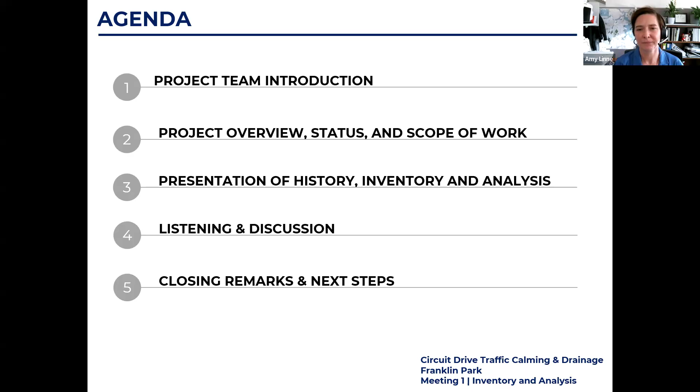Once again, I'm Amy Linne, Project Manager from Boston Parks. Also joining us from Boston Parks, we have Michael McMillan, Community Outreach Coordinator, and he will be moderating the meeting tonight, and Lauren Bryant, Project Manager for the Franklin Park Action Plan and other capital projects in the park. For the Mayor's Office of Neighborhood Services, we've listed our neighborhood liaisons. They're a great resource for community concerns. And then our consultant team is Nitsch Engineering, covering transportation and green infrastructure. Reed Hildebrand, who is the lead designer for the Franklin Park Action Plan, is on the team in an advisory role.

This is the first community meeting for the Circuit Drive Safety Improvement Project. With the feedback from tonight and from an online survey we'll distribute soon, the design team will develop a concept plan to share at a second engagement event in the summer. Then at the final meeting this fall, we will share the recommended design. During the fall and winter, our design team will develop construction documents and also go to Landmarks Commission for project approval. We expect to start construction on the roadway improvements in early 2026 and complete the work in summer 2026.

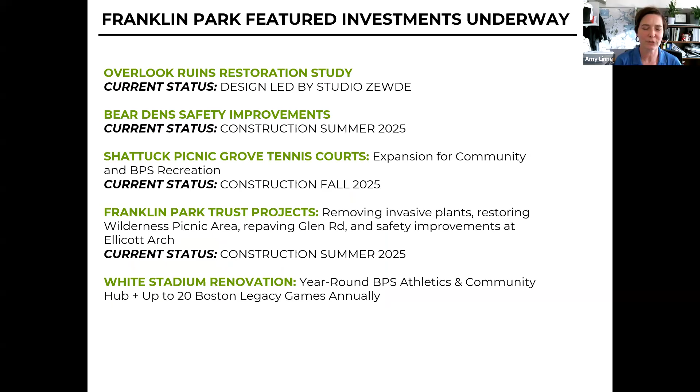Circuit Drive is one of several projects going on at Franklin Park. I will add a link in the chat for the Franklin Park Initiatives webpage in case you would like to look into the other projects in more detail.

Next slide. So this is an overview of our approach to open space design, which includes the City of Boston priorities, safety guidelines and regulatory guidelines, such as ADA, community input, such as this meeting tonight, and the Parks and Recreation goals.

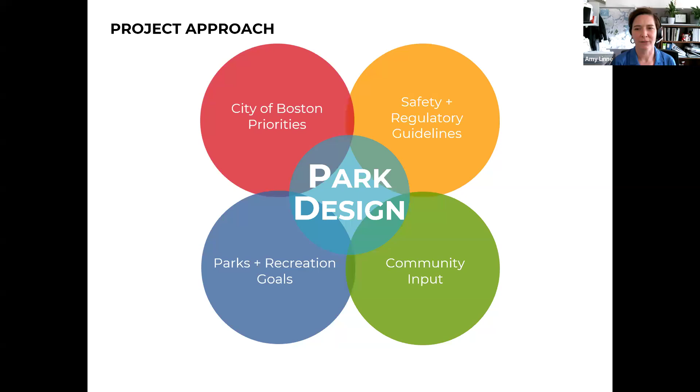So with that, I will hand it over to Jeff Bandini from Nitsch Engineering.

Thank you, Amy, and thank you everyone for having us present to you this evening. Again, Jeff Bandini, Senior Project Manager with Nitsch Engineering. I have two esteemed colleagues with me this afternoon to share some of the great feedback that we've received from the Niche team, Maddie Augustine, who is a transportation engineer in our group, and Sydney Picard, who is one of our water resources design engineers.

And also Lydia Cook, Senior Associate from Reed Hildebrand, who we mentioned as part of the advisory role based on her experience in the Franklin Park Action Plan.

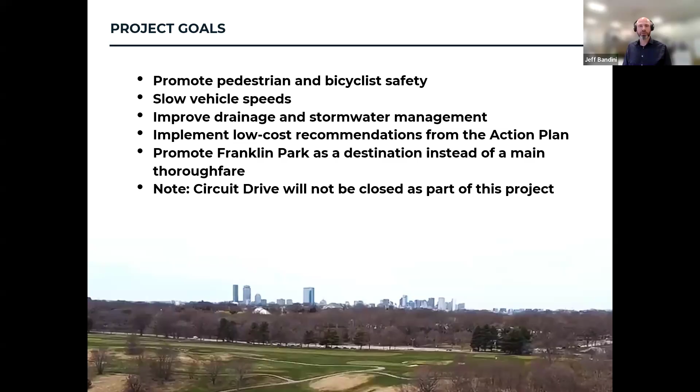As far as the initial scope of this phase, that was not being considered. Mostly our goals are to present sort of the low cost, very easy implementable solutions to address some of the concerns that we'll share with you this evening. Next slide, please.

So Lydia from Reed Hildebrand is going to discuss some of the, a little bit of a recap from the action plan and how some of those next steps and implementation will be addressed as part of this scope of this project. Thanks, Jeff. Hi, everyone. My name is Lydia Cook, and I'm a landscape architect with Reed Hildebrand.

Our office led the design team for the Franklin Park Action Plan. Today, I'm going to share a little bit of context and background, both on the park's history and evolution, and also the analysis, high-level goals, and recommendations from the action plan related to Circuit Drive specifically to help set the stage for our meeting and conversation tonight.

Next slide. Many of you are familiar with and participated in the Franklin Park Action Plan process, but for those of you who did not, the action plan was completed in 2022 in collaboration with Boston Parks and Recreation Department, the Franklin Park Coalition, and other park stakeholders, as well as the local community, to produce a strategic vision to guide investment in Franklin Park over the next 20 to 30 years.

Its proposals in this plan respond to changes that have taken place in the park over its 120-year plus history, but also seek to meet this moment in time.

They advocate for thoughtfully guided, community-driven improvements that are grounded in a deep understanding of the park's historic fabric, its ecological systems, and that those recommendations are implemented through continued dedicated investment so the park can do what it does today, but better. It's this work and many decades of the community advocacy for this park that sets the stage and the context for our continued conversation tonight.

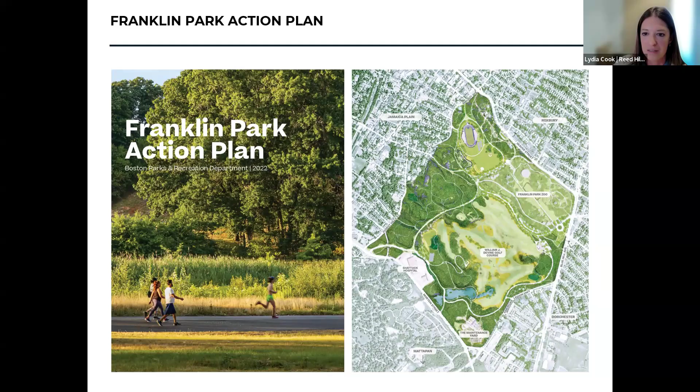For tonight's conversation, the most pertinent one is clarify movement. This recommendation encapsulates goals that support multimodal movement in the park, safety for bikes, pedestrians, and vehicles, improved access to the park's resources, and enhanced performance of its ecological systems, which in this case includes stormwater management and drainage. All of these goals relate to an improved experience along Circuit Drive.

Next slide. So let's quickly look back to understand how the park evolved to what we know and experience along Circuit Drive today.

After what we know as Franklin Park transitioned from agricultural homesteads and farm roads to a public park designed by Frederick Law Olmsted, the original Circuit Loop, as well as the Playstead Loop and other primary paths through the wilderness, were designed for moving around the park via horse and carriage, and Glen Road was intended for city through traffic. The park's circulation in that original design was responsive to site conditions.

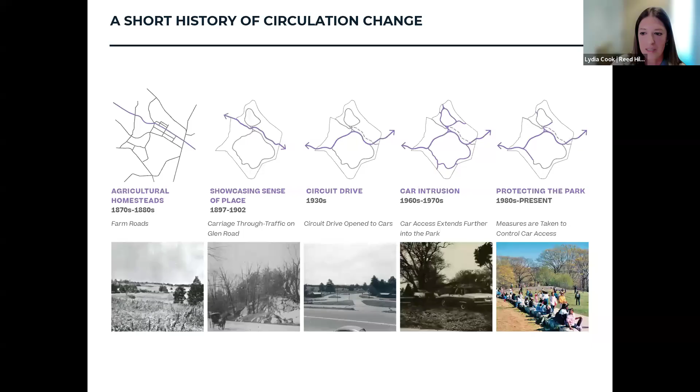Next slide. So in the more recent past, the southern portion of the Circuit Loop has been returned to a pedestrian and bike path. Today, cars and the city bus are still a very important part of how people move through the park and reach their destinations, whether that's Playstead, Ellicottdale, the zoo, or the golf course.

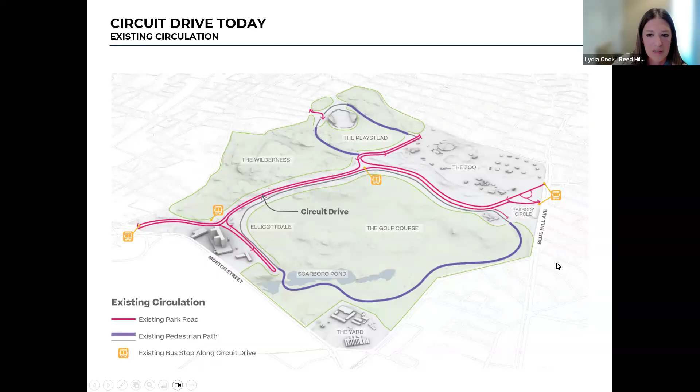Next slide. But we also know from our engagement in the action plan process that Circuit Drive is not just about cars, it's more than that. This also includes pedestrian paths that are highly used as a destination, drawing neighbors of all ages and from all directions for biking, walking, recreation, and community events.

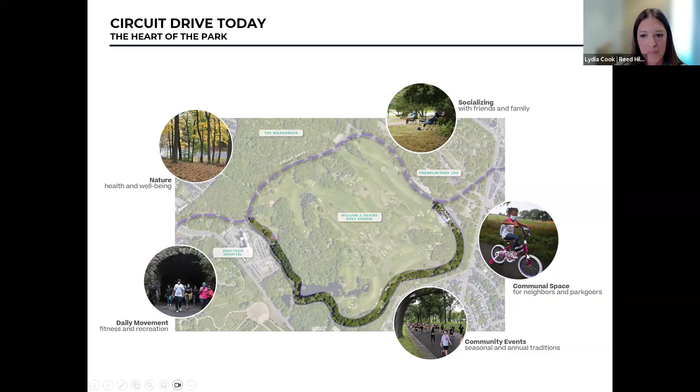Next slide. But there are some challenges associated with the drive today, which is what we're here to talk about tonight. There are areas of unclear or insufficient path and bike infrastructure, few designated crossings, and fast traffic along the drive, which can all create conflicts between pedestrians, bikes, cars, and parking areas.

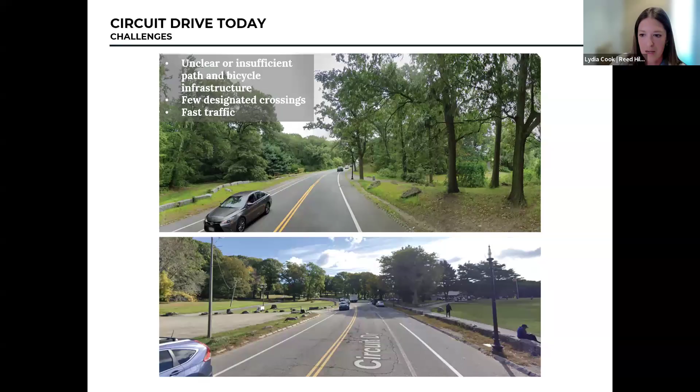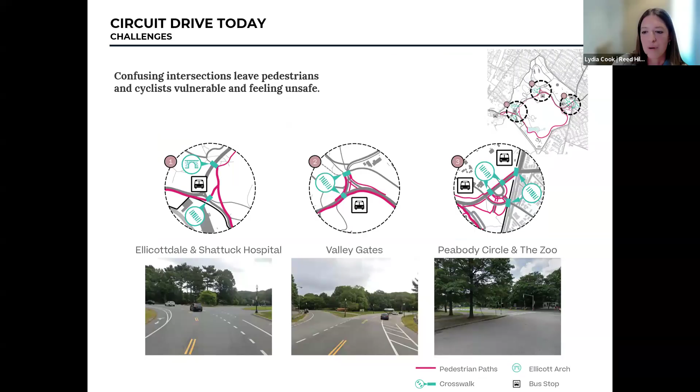Next slide. There are also several confusing intersections along the way that leave pedestrians and cyclists vulnerable and feeling unsafe. So really improving these pedestrian connections across and along the road, especially at these intersections, can enhance visitor arrival, circulation, and safety. Next slide.

While the action plan did look at proposals related to the comprehensive circulation system in the park, some of which were quite long-term and ambitious, it also included several immediate recommendations, or make-safe improvements, for Circuit Drive in particular. So we'll talk about some of those. Next slide.

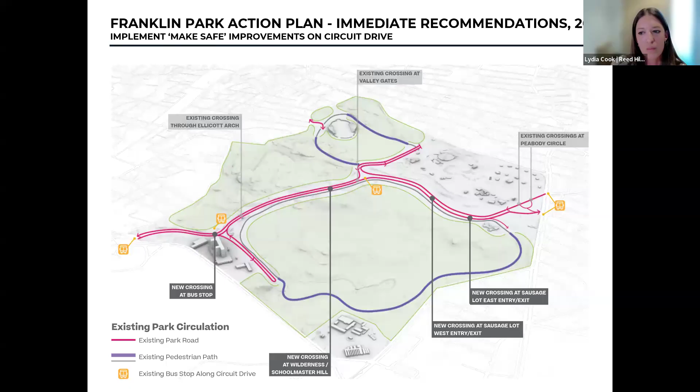Those included implementing immediate changes to improve safety for bikes and pedestrians along Circuit Drive, including adding crosswalks at key locations, considering traffic calming measures at key crossings to prioritize pedestrian safety, providing a designated and continuous bike lane along the drive, maintaining critical bus stops to ensure access for all park users, collecting updated traffic counts, which Maddie will talk about, and continuing coordination with city agencies that Amy mentioned at the beginning, including the Boston Transportation Department. Next slide.

The action plan also included a high-level inventory of drainage challenges in the park. Today, the park suffers from an aging and undersized pipe drainage infrastructure, which often causes localized flooding and other issues. A major factor in the declining water quality of Scarboro Pond is polluted runoff from Circuit Drive and the parking areas along it.

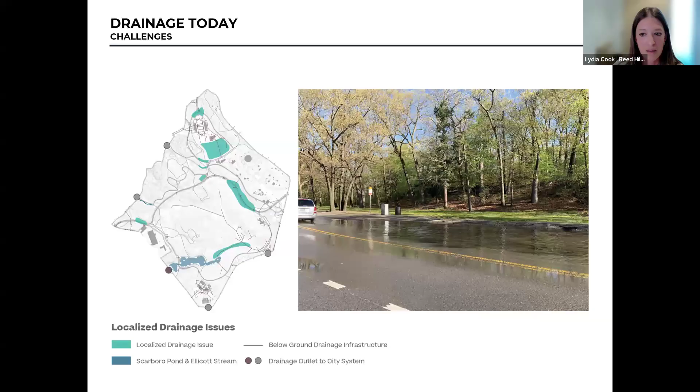So this runoff is carrying debris and other pollutants that discharge directly into the pond or the city's drainage system, and impact water quality both within the park, but also can cause flooding downstream of the park itself.

As we know, the health and resilience of the park's hydrology really goes hand in hand with the function of the park's above ground and below ground drainage systems, and offers opportunities for on-site green stormwater management.

As it relates to Circuit Drive and the areas adjacent to it, the action plan identified two very high-level strategies that can be considered, and Sydney will talk more in depth about this. The action plan identified hold and release—an idea around using areas like parking to slow and hold peak stormwater runoff during storms by detaining water and slowly releasing it back into the piped system.

Slow and clean is using Circuit Drive as an opportunity to intercept runoff before it reaches the golf course by rerouting it through vegetated swales, through curb cuts, to filter and slow water before it enters that pipe system.

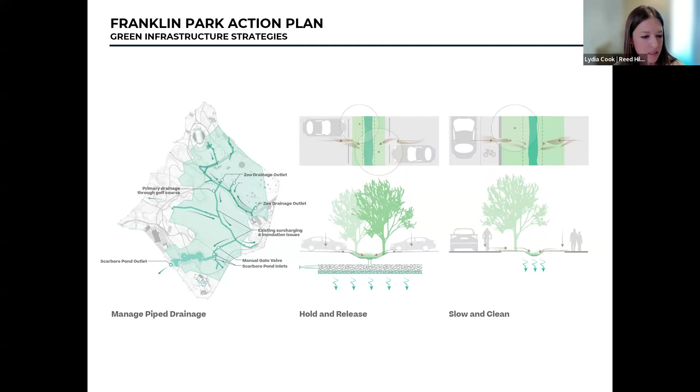So I will now turn it over to Maddie to talk a little bit more about the transportation analysis findings. Thanks, Lydia. So I'm Maddie Augustine. I work for Nitsch Engineering as a transportation engineer, and I'm going to be running through some of the observations we've made about the transportation side of Circuit Drive.

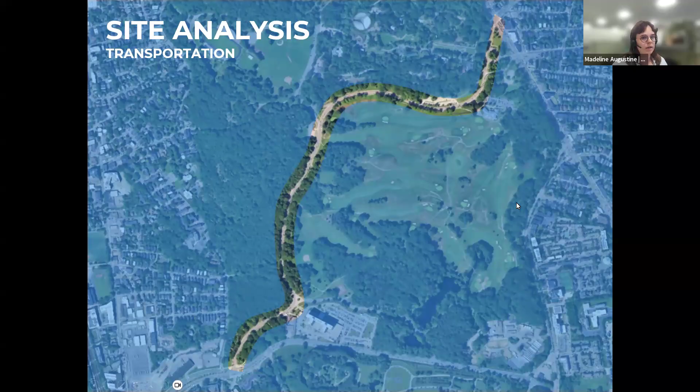We'll look at some prospective strategies as well for possible solutions. Franklin Park and Circuit Drive itself are situated within a broader network of parks, including the Arboretum as part of the Emerald Necklace, Southwest Corridor, and Circuit Drive provides connections both to and through Franklin Park between the Roxbury, Dorchester, Jamaica Plain, and Mattapan neighborhoods.

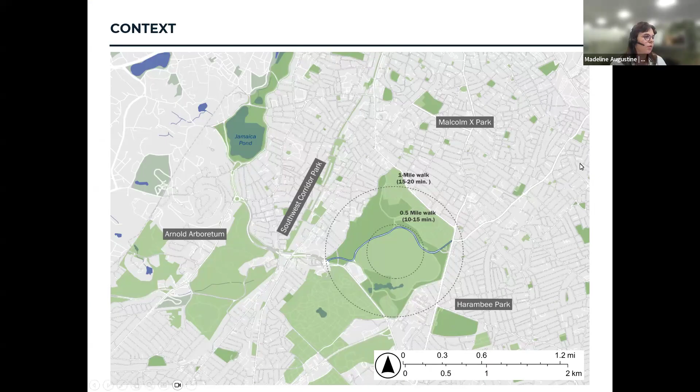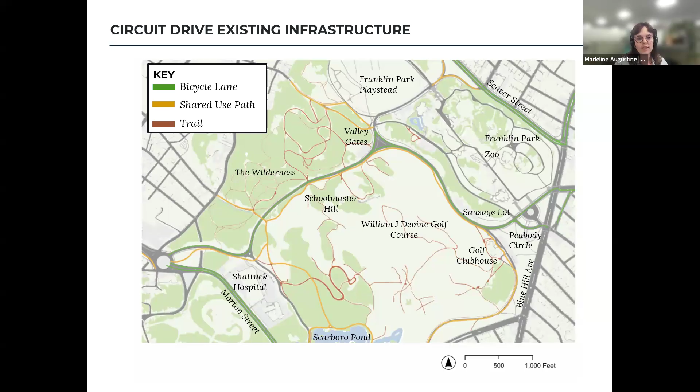Within Franklin Park, there's an existing network of shared use paths and trails, as well as on-street bike lanes in some locations, and vehicle lanes and parking areas. All types of roadway users use Circuit Drive to access Franklin Park and the surrounding neighborhoods, and buses also utilize Circuit Drive, particularly MBTA Route 16, which stops at Peabody Circle, Valley Gates, Shattuck Hospital, and Morton Street.

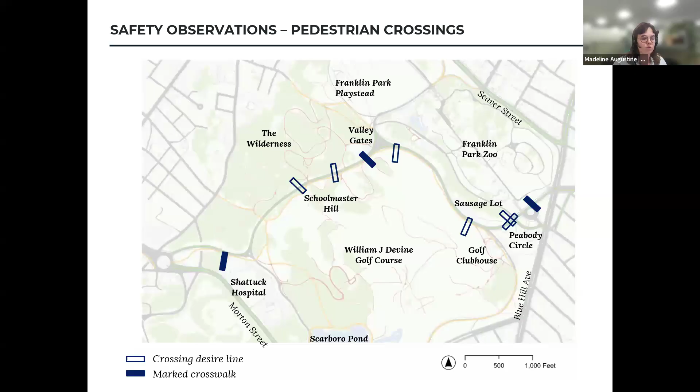Looking at crossing the street as a pedestrian, it can be relatively challenging due to the wide roadway and high traffic speeds, and I'll talk a little bit more about the specific speeds later. But there are several locations where a pedestrian may want to cross the street despite a lack of formalized crossing, such as by Schoolmaster Hill and the Wilderness.

Looking at where there are marked crossings, these are often very long and leave pedestrians exposed to traffic for a long time, as they take over 50 feet just to cross two vehicle lanes of moving traffic.

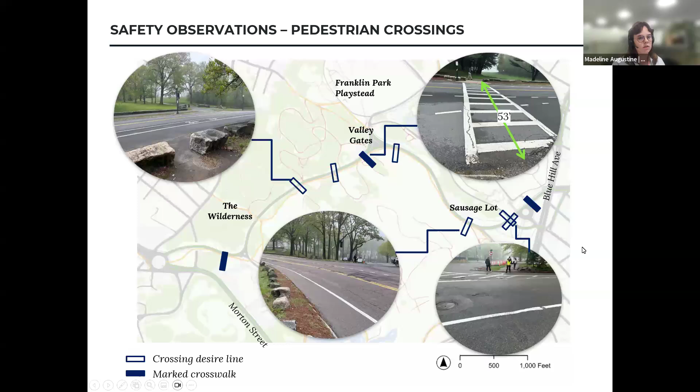While there are existing shared use paths and other walkways through the park, there are also a lot of areas where pedestrians are walking along desire lines where, despite a lack of pavement, there are worn areas where people walking is wearing away plants that hold soil into place. These worn areas raise safety and accessibility concerns.

One of our theories is that pedestrians end up stuck alongside one side of the roadway as they try to cross, but are unable to.

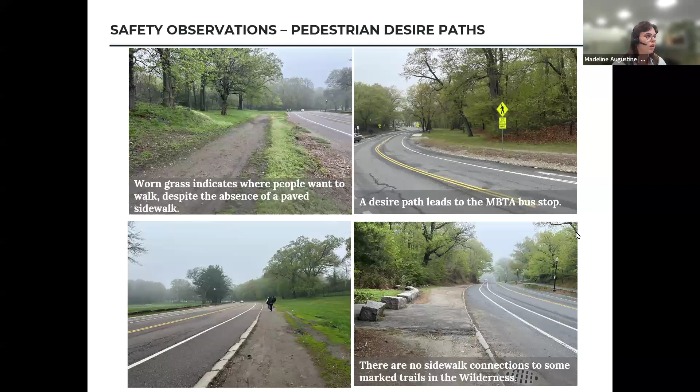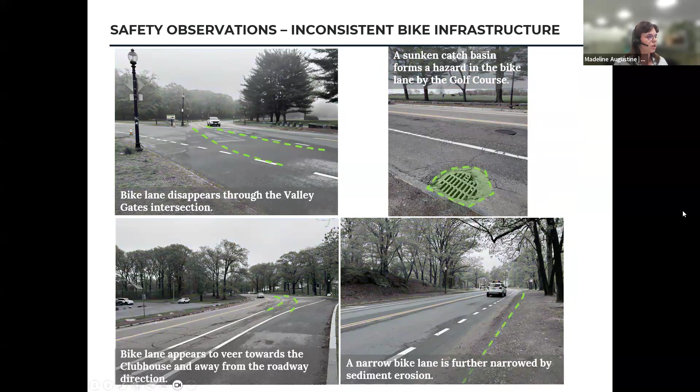If you're on a bike going along Circuit Drive, the bike lanes are inconsistent or sometimes impacted by sediment erosion or a curb, a catch basin that has settled. Bike lanes appear to veer in different directions or they disappear through intersections. This highlights a little bit of where we would expect to see some of that bike infrastructure.

Some of the erosion that we saw in the bike infrastructure is also present and impacts accessibility of bus stops. There are sediment impacts near the Shattuck Hospital bus stop, and close to Valley Gates, there's no clear location for bus riders to wait, board, or alight the bus.

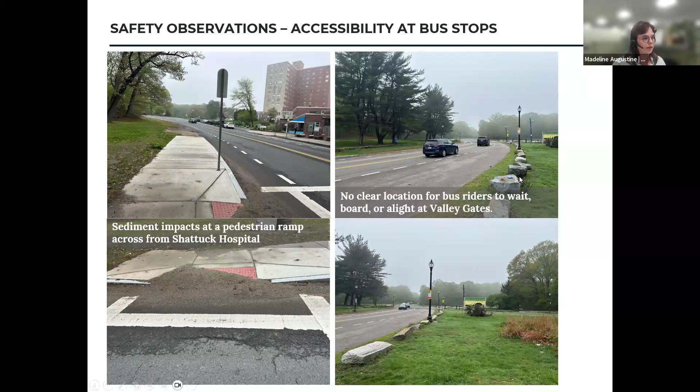If you're a driver, there's also some confusing expectations. There's a lack of wayfinding to zoo parking lots, and there's dual signals at Peabody Circle, which may encourage drivers to speed up and beat the light rather than slowing down to enjoy the park atmosphere. There's some signage without corresponding crosswalks, which just leads to some confusion as well.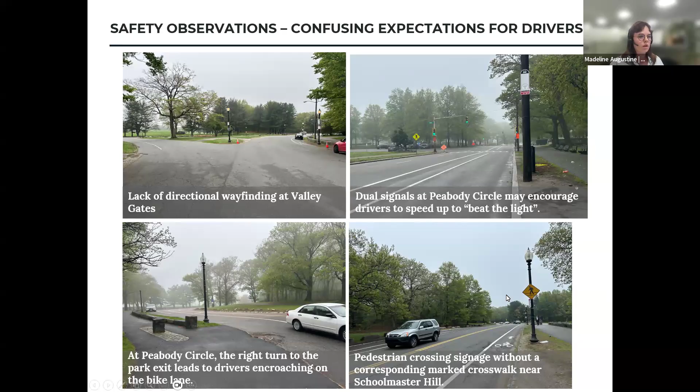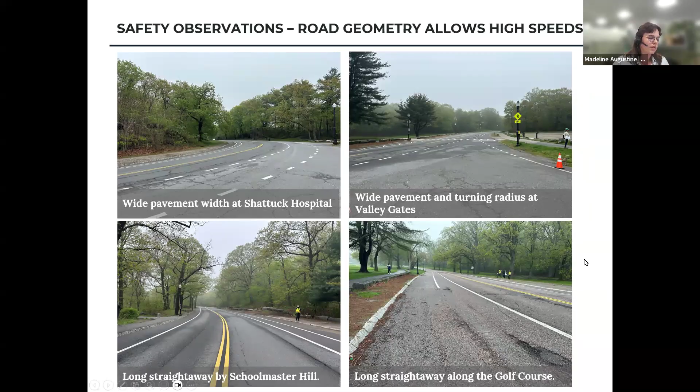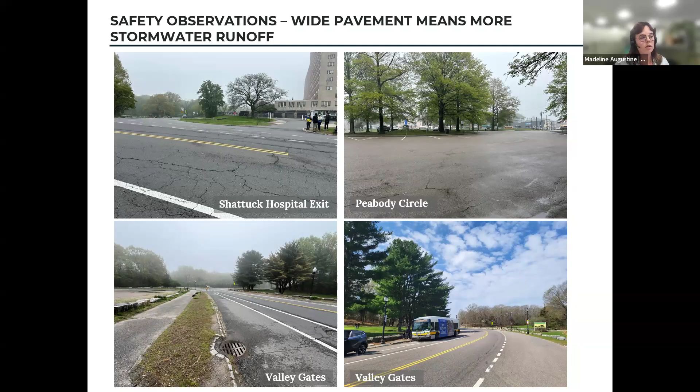The wide pavement widths and long straightaways also allow for high speeds, so the road geometry is making drivers feel comfortable to go fast. We see long straightaways near the golf course and Schoolmaster Hill, and wide turning radii and long crossings. Wide pavement also means more stormwater runoff, which again Sydnie will talk about, but there are opportunities for us to use some transportation solutions and create space for some green infrastructure as well.

Looking at the quantitative side of all of this, we collected traffic data on a consecutive Thursday, Friday, and Saturday in March. The vehicles per day that we see is pretty typical of a Boston roadway, which does imply that people are using this for Circuit Drive as part of a broader transportation network rather than specifically to access Franklin Park. These vehicle volumes of about 14,000 vehicles per day correspond to a vehicle arriving at a given spot every 3 to 4 seconds, give or take.

Some of this also comes in platoons or waves of cars, which only exacerbates the difficulties crossing the street.

We also looked at the traffic speeds. The speed limit along Circuit Drive is 25 miles per hour, but the average directional speed over 24 hours is closer to 35 miles per hour. And higher speeds are less safe for people outside of cars. There's a significant increase in the likelihood of a serious injury at higher speeds, like 35 miles per hour.

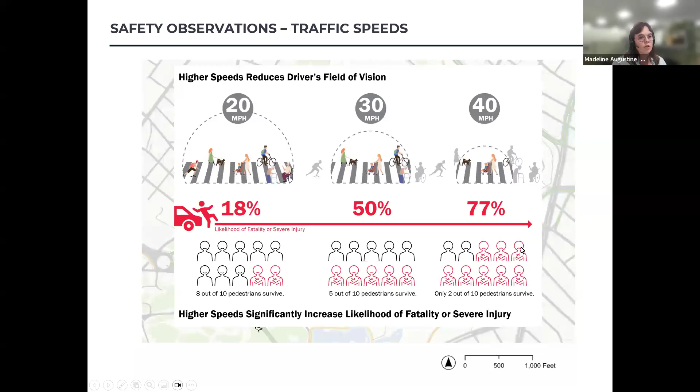So we have a couple strategies that we are thinking about implementing that Boston Transportation has used as part of a first step in a multi-step project to make Circuit Drive more comfortable. So the Boston Transportation Department looks at safer crossings, safer speeds, and safer turns.

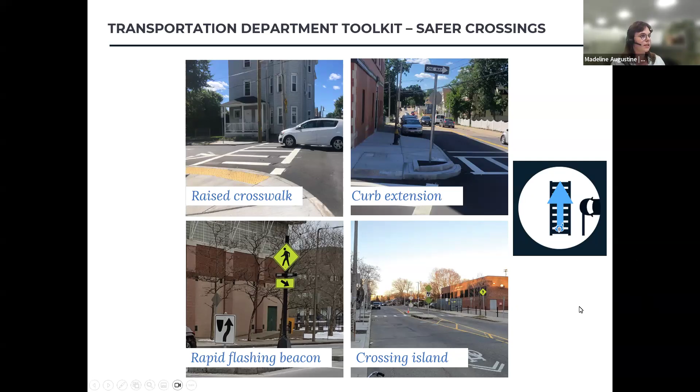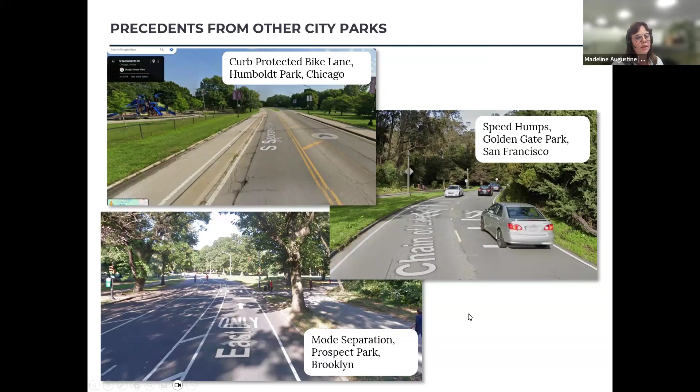Looking at what other places in Boston are doing to implement some traffic calming, there's a new raised crossing along the Emerald Necklace, and the Arboretum is installing some entrance improvements as well. Other cities are working on traffic calming within their parks as well. San Francisco, Chicago, and New York are all looking to install infrastructure that makes their parks more comfortable places to be. So looking at stormwater, Sydnie will take us through that.

Thank you, Maddie. So just to introduce the broader idea of stormwater, it's rainfall that hits a surface, whether it be pervious or impervious. Pervious includes any of your natural surfaces, including the woods, landscaped areas like the golf course here, and impervious surfaces include the roadway, sidewalks, roof - places where the rainfall and stormwater is going to hit and then run off and collect into a drainage system.

Conditions contributing to stormwater will increase in the future with climate change, including more intense and frequent rainstorms. With that, we need to plan for the future of stormwater and how to manage it along Circuit Drive.

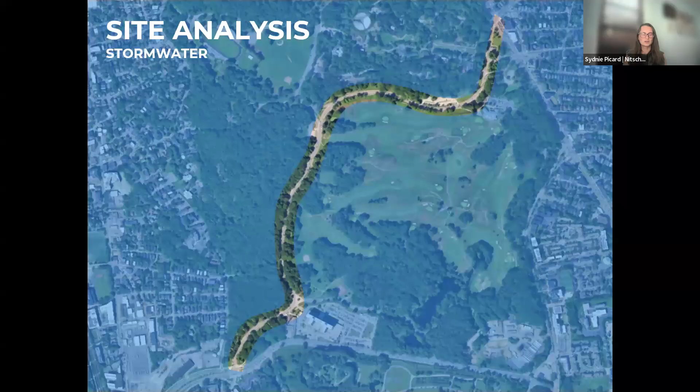So there are 3 major low points along Circuit Drive where water will run off of the high points and collect in these lower points. If the drainage infrastructure is under capacity, there's too much stormwater for it to be able to manage, that's where it will collect and start ponding and flooding either the roadway, walkways, and it can impede traffic flow as well as pedestrian access and safety throughout the site. I know that there's been instances where Circuit Drive has actually been closed due to flooding.

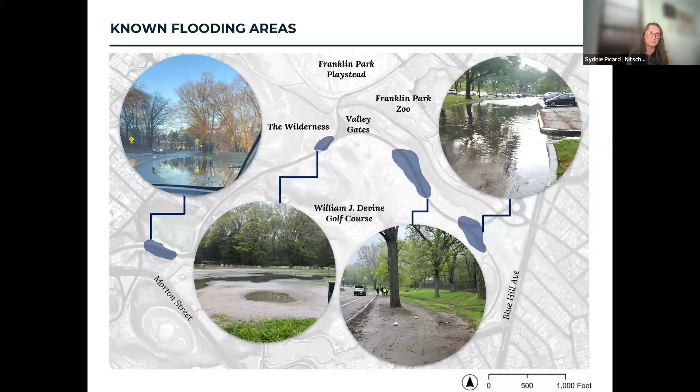In the next slide, you'll see the different watersheds. This shows the area contributing to Circuit Drive through stormwater, the topographic area draining to Circuit Drive. It's not just Circuit Drive, it's a lot of off-site area, a lot of area for these pipes that are at their current sizes, undersized to be able to handle it. This can contribute to those major flooding issues, causing drive closures and issues for traffic flow and pedestrian flow.

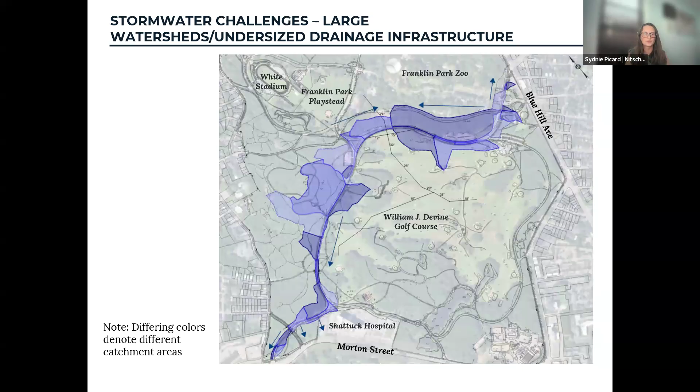We can help fix this by implementing green infrastructure to help hold back the stormwater, infiltrate as much as we can to reduce the volume, and treat it before we release it back into the drainage infrastructure. Next slide.

Some challenges we witnessed during our site visit that contribute to the aging and undersized drainage infrastructure, and to the flooding, are erosion and compaction and isolated low points. On the top left, you can see pedestrian compaction. This is where pedestrians, without proper sidewalks or other access, create their own paths and compact the soils, which prohibits plant growth and causes erosion, with sediments and soils running off within the stormwater.

Those get carried into the drainage infrastructure and can clog catch basins and pipes, reducing the capacity of the drainage infrastructure to convey stormwater away from the site. On the bottom left, you'll also see areas where, without curbing, vehicles pull off, causing compaction of the soils and erosion and large areas of sediment collection that eventually get carried into the stormwater system. The picture on the top right is an isolated low point.

This is due again to compaction over time. It's not a design flaw of the roadway—over time the bus continuously pulls into this spot, so the tire ruts have caused the pavement to settle. This creates a ponding area where water collects. You can't see it in this picture, but at the very top of that ponding there's a catch basin, but because it's depressed, the water can't quite reach it. So the only other way for this water to escape is to evaporate over time. The catch basin on the bottom right is a clogged catch basin.

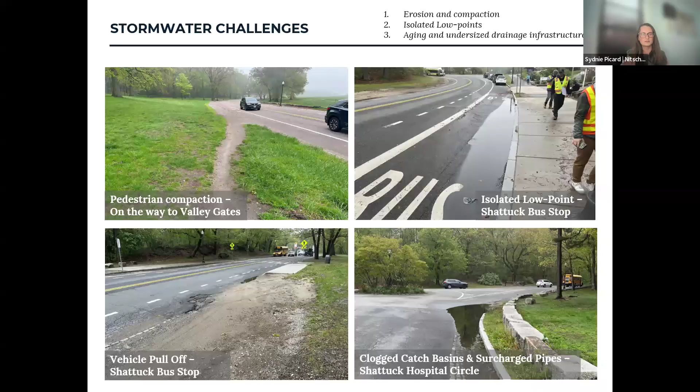Yeah, that's fine, Maddie. You can go to the next slide.

This is just highlighting the areas I'm describing here. It's a clogged catch basin—there is a catch basin at the bottom of that ponding. This could be due to carried sediments, or it could be due to an overtaxed and undersized drainage infrastructure here.

Another strategy we could use is bioretention—smaller landscaped areas with flowers and different native plant species that we can put next to paved areas, sidewalks, or the roadway. We can sprinkle these smaller interventions throughout to help manage stormwater across the site and reduce those ponding zones. Next slide.

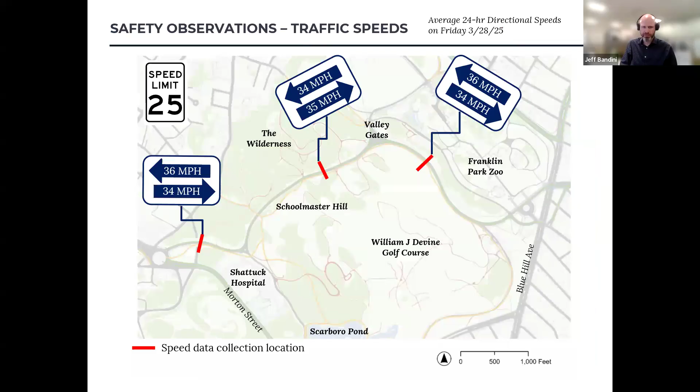But just understanding the complexity with the traffic data collection, we collected a 72-hour continuous count for the daily traffic volumes, the vehicles per day that Maddie shared in her slide. Maddie, if you're still running point on this, maybe go back to that slide to provide a little bit more context. As far as the volumes, we looked at a Thursday, Friday, and Saturday, and the data collection between the 3 days was actually fairly consistent, which, based on your question, would lend to believe that Fridays are typically lower.

Given the recreational use of this site, the thought process here is that Fridays are typically slower on an average Boston street due to people working from home and taking vacations and things like that. For use such as this, the theory is that vehicles and travelers will find the fastest path, right? If it's a Friday and it's a good day to go golfing, or a good day to go for a walk before you go home to work from home, or a day where you travel through the park because you believe that can be your fastest destination - all other days of the week, as you suggested, might actually be more traveled. So it's all kind of this balancing system in terms of Thursday, Friday, Saturday being the higher day.

As far as the speed goes, and Maddie alluded to this a little bit as well, when we were out there observing the site, we actually saw several platoons of vehicles coming through the park, right?

So you don't necessarily see a 45-mile-an-hour vehicle every once in a while. On either end of the park entrance are signalized, so you tend to see groups of anywhere between 3 and 10 vehicles entering the park at any given time.

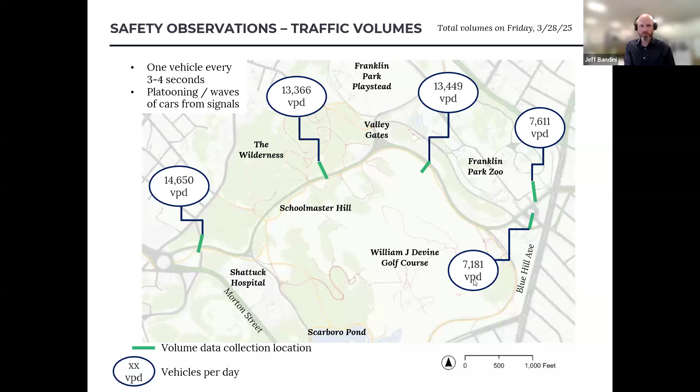Great, so I had two questions if you have the time. The first was, it was alluded to at the beginning of the presentation that there was a plan put forward 4 or 5 years ago to fully pedestrianize the road. That seems in a lot of ways like it would be simpler and cheaper to me. It would take very little to put up a few bollards to block traffic or a gate. It wouldn't require mode separation in the park. You talked about runoff issues, that would greatly reduce the pollution coming from motor vehicle tires and particulates. And it would be safer, as people have mentioned. It's a very dangerous place, a place we don't feel comfortable crossing with our 9-month-old. So I was just curious why that plan was no longer under consideration.

These tools that we're utilizing now are really sort of a short-term fix, something we think we can do fairly easily in the short term. Lauren, I don't know if you want to weigh in on that vision in the action plan around closing it, but I think there's maybe some challenges there.

Yeah, absolutely, I'm happy to give a little context. I know that during the action plan, it was one of the options proposed, but there was never a plan that said we're definitely going to close this. It was sort of multiple ends of a spectrum of what kinds of improvements or changes could happen on Circuit Drive, and that was one end of the spectrum. We had some people very in favor of it, like yourself, who thought this was a great idea for reconnecting the park for safety purposes. We also had a lot of people very against it and very upset about it, saying things like, how can people with disabilities or older people get into the center of the park? So we've heard a lot of comments on both ends of that challenge.

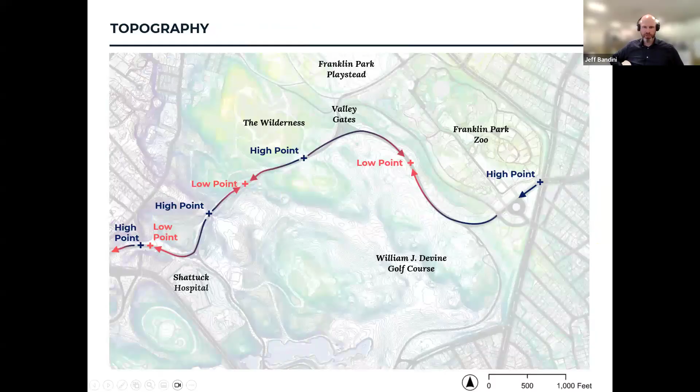I didn't get a chance to chime in about Zach's previous comment on observation versus geometrics. In the industry, we've certainly seen better success with more geometric modifications than with warning signs. The physical barrier of not being able to travel faster is a more streamlined solution than just telling people to travel slower. That's why, although not considered part of this project, we've seen successes in other projects with roundabouts, because the geometrics simply don't permit fast travel due to how it's designed. So those are a couple thoughts on the toolkit items presented.

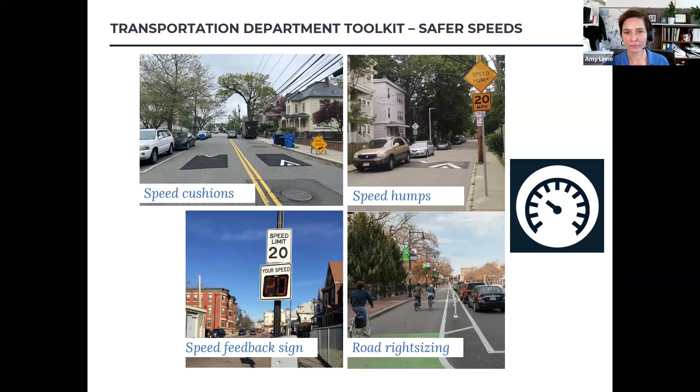Lucas? Hi, I had a question about potential plans for the bus stops, especially because you mentioned there are areas of the park where widening of the impervious surfaces is not practical.

Or there might not be enough room for adequate pedestrian or cyclist paths and walkways. Has it been considered that buses might be able to, instead of pulling over to a stop, just stop in the lane, which should reduce the amount of space the bus needs on the street. In addition, it would be able to just continue moving again once passengers have boarded or deboarded, instead of having to wait to merge back into traffic.

We could certainly look at that as a solution. That's sort of counterintuitive to some degree, but I understand the point - it's good to have a space for buses to pull off and let passengers board in a streamlined way. But creating that inherent way for vehicles to slow down - if a bus blocks a lane while passengers board, that inherently stops traffic for a certain amount of time. To one of the comments we've seen, sometimes people don't understand why vehicles are stopping in the lane and might just go around them anyway. But we'll look into how this dovetails with challenges related to the impervious areas - like the one bus stop near the hospital with pavement rutting and pedestrian ramp washout. So that's part of what we'll look at in terms of improving accessibility for all users.

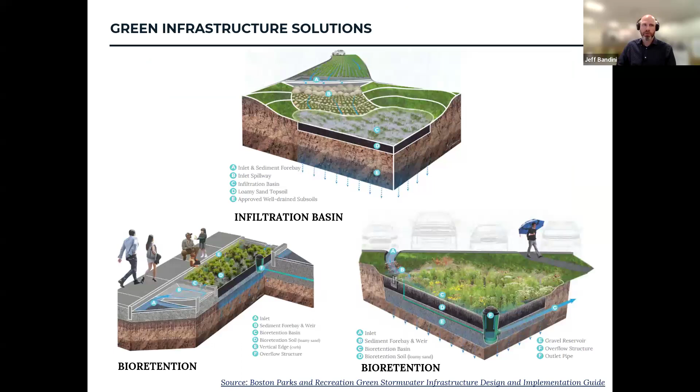Could I chime in there too, Amy? As we were discussing this, and we meant to address this earlier, I know Maddie and Sydnie from the Nitsch team presented their slides separately, but there's opportunity for us to integrate both transportation and green infrastructure improvements simultaneously. One of the solutions Maddie presented in that animation, Maddie, if you could go back to that slide about teeing off the intersection. In the before image, you see this acute skew intersection. By teeing off an intersection, there's opportunity to reclaim the space provided by the T as green infrastructure or pervious area to accompany that improvement. So as we go through these potential improvements in this toolkit, there are certainly opportunities to provide simultaneous pedestrian and green infrastructure solutions.

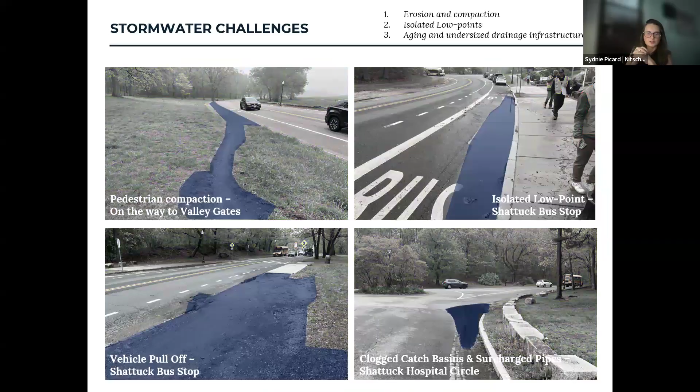I also want to jump back to the stormwater question to answer Marty's question about directing stormwater somewhere else other than Scarboro Pond. Stormwater will infiltrate our pervious surfaces where it can, but there's a point where the soils become oversaturated and it starts to pond—you can't get any more infiltration out of the land. So for stormwater to be carried off-site, we introduce drainage infrastructure that outfalls to surface waters. If it's not Scarboro Pond for this site, it's the Charles River. It's different surface waters that it'll eventually need to enter to be carried away from the site.

Great, thanks, Sydnie.

Let's see, Darian, are you able to unmute? I think I am, thank you.

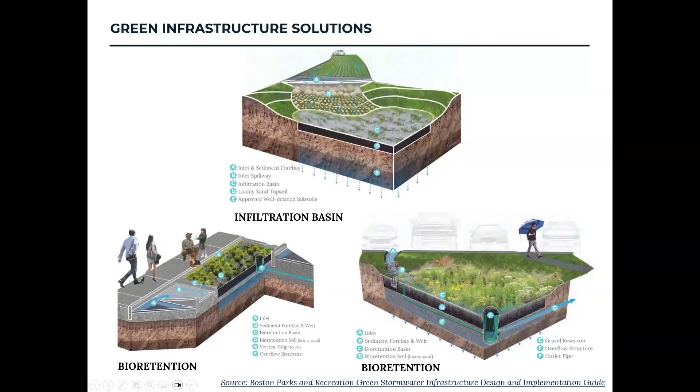So I know I asked this question, and someone else asked something similar in the chat a few minutes later, so I just want to make sure it gets addressed. If we can go back to the traffic portion, one of the options raised was the middle island, like the middle lane island—we have examples of it on Columbus Ave. I bike, I walk, I drive, I do all the things, and I think the crossing island narrows streets significantly. If you look at the Columbus Ave changes they made, because the driving path is a lot more narrow, cars naturally need to move a little slower, otherwise they end up getting hurt. If we can consider that as an option, some of these other things might not be as necessary—not saying we won't need them, but it would make it safer. I've lived in the area for a while and seen people moving at various speeds while walking across the street. It's a very, very wide street, so I think something like that would be nice to consider.

Yeah, that's a great comment. I think it kind of has the dual purpose too of calming traffic and also giving pedestrians that refuge.

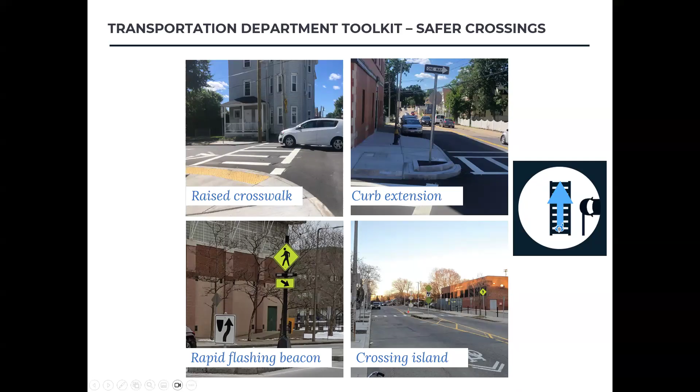So if we go back to the last slide that you all keep going back to, I think we've gone over the fact that there are some informal pathways that people like to take. If you look along the side of Franklin Park Zoo, there's that walkway that people often take. That's a good indicator that we probably should have an island there. I definitely know when you're trying to go towards the Valley Gates, that place is a nightmare. You should probably have 2 or 3 of these kinds of middle lane intersections there, because it's like a triangle. Having many of these interspersed would allow people to get to the wilderness or other places they might naturally be trying to go to, but that is very difficult to access as of right now.

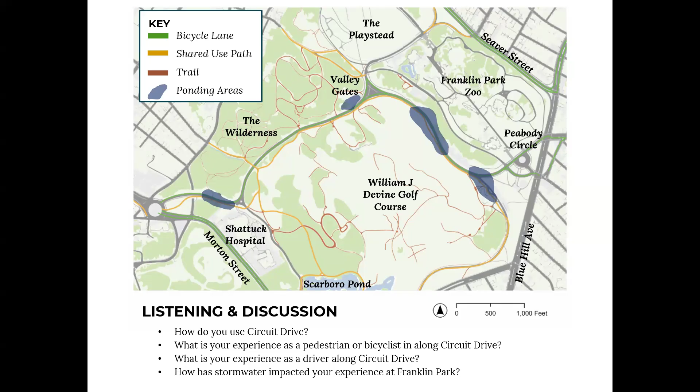Yeah, I guess I just don't quite understand why, because to me it seems like the goal of most design processes is to do low effort or low cost, high impact interventions, and this seems like it falls under that category.

If everyone were in agreement that that was the right solution, I think it could be acted upon, but we heard loud and clear that there isn't consensus on this, not on this call, and there wasn't during the action plan either. We promised that before any decisions would be made, that would be its own process. We also talked about needing to do a lot more transportation analysis, so this just isn't that project. I get what you're saying, it seems like it would be easy, but it's not. It's not even easy to get consensus with the people in this meeting. So I hear you, but that's really not where this project is going right now.

Oh, that's fair. I doubt there will be consensus on much of anything, and I would agree. That's a conversation for another day, for sure. All right, thank you. Thank you. Great, thank you.

Representative Holmes?

So again, I have to apologize, I'm in the middle of three meetings, but there is consensus from the part of the neighborhood I represent. We will not close Circuit Drive. We will come burn that place down before we close it. There is clear consensus on my side. I hear a lot from maybe the JP side that it will be an easy decision to close down Circuit Drive. You are going to block off the entire blackest neighborhood in this entire state, which is what I represent.

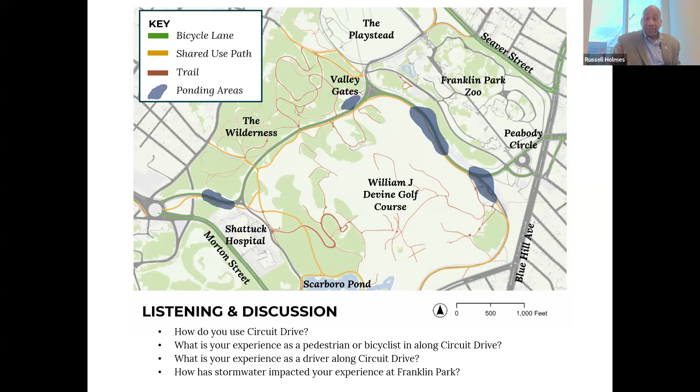Thanks, thank you Rep. Holmes. And yeah, you're right, just to clarify, we're not proposing it as part of this project, for sure. So I appreciate those comments and hearing the thoughts from your district. I know it's not every single person, since there was a comment about that in the chat too, but thank you for sharing that with us. And just to clarify for everyone, this project is not proposing closing Circuit Drive.